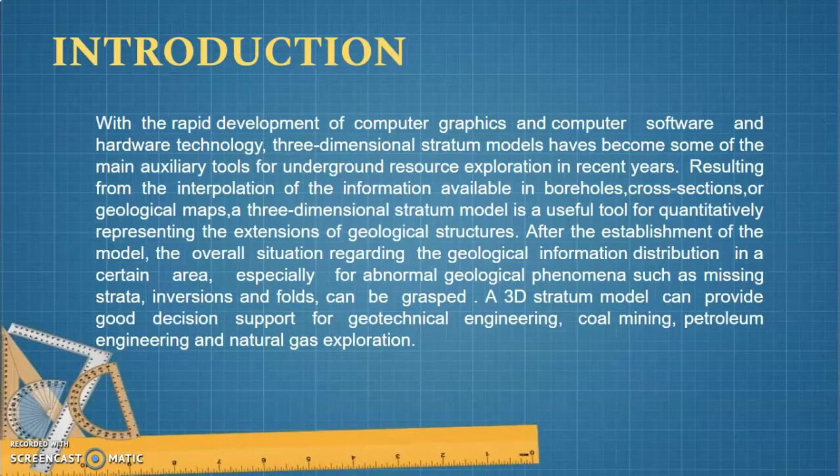Next is our definition for surveying, Stratum, Spatium, and Cadastral. Surveying is the science, art, and profession of determining the positions of points on the surface of the earth and measuring the distance, directions, angles, and elevations between them. This data helps accurately create maps and determine plot boundaries.

Stratum is a survey carried out for the disposal of the underground land as specified under Part 5A, Section 92A of the National Land Code 1965. The purpose of the survey is for the issuance of a title for a stratum of underground lot.

Spatium is concerned with a multidisciplinary approach to spatial, regional, and urban planning and architecture, as well as with various aspects of land use, including housing, environment, and related themes and topics. It attempts to contribute to better theoretical understanding of new spatial development processes and to improve the practice in the field.

For Cadastral, cadastral data, also known as cadastre, contains official legal documentation concerning the quantity, dimensions, location, value, tenure, and ownership of individual parcels of land.

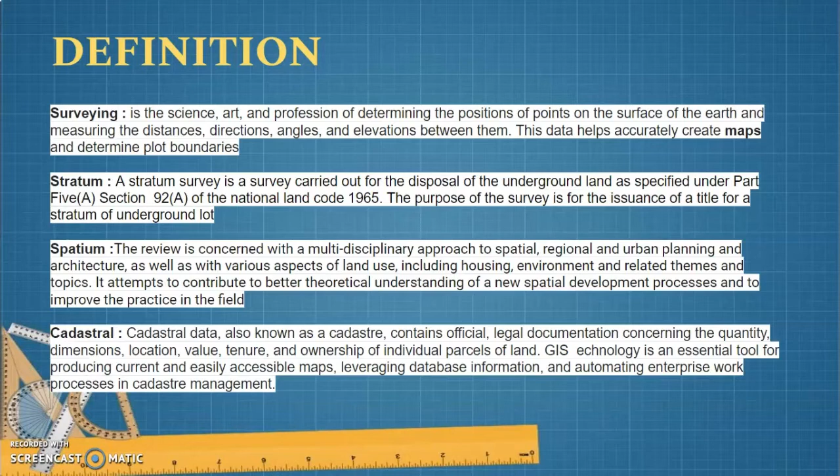GIS technology is an essential tool for producing current and easily accessible maps, leveraging database information, and automating enterprise work processes in cadastral management. Next is development of technology.

The JUPEM, Department of Survey and Mapping Malaysia, has gone further afield in the way it conducts its cadastral business. It has made a paradigm shift in its workflow by transforming its conventional surveying technique into its current modern system with the help of cutting-edge technology.

The evolution of technology has played a significant role in changing the way JUPEM runs its business, from conventional to paperless and fully automated.

As we can see, these are two 2D cadastre such as certified plan and certified strata plan, and then 3D cadastre. The concept of 3D cadastre simply defines a 3D lot as having limitation in all three dimensions. This principle means that a 3D lot may extend from a specified level and as far into the ground defined by its depth, or upwards into the air defined by its height.

Examples include the 3D conceptual model, Stratum conceptual diagram, and Spatium conceptual diagram.

Next is SmartKADASTER. The main purpose of SmartKADASTER is to establish a multi-purpose cadastral system for the future, with the prime objective of providing a solid cadastral-based spatial analysis platform which supports multi-purpose services towards smart cities.

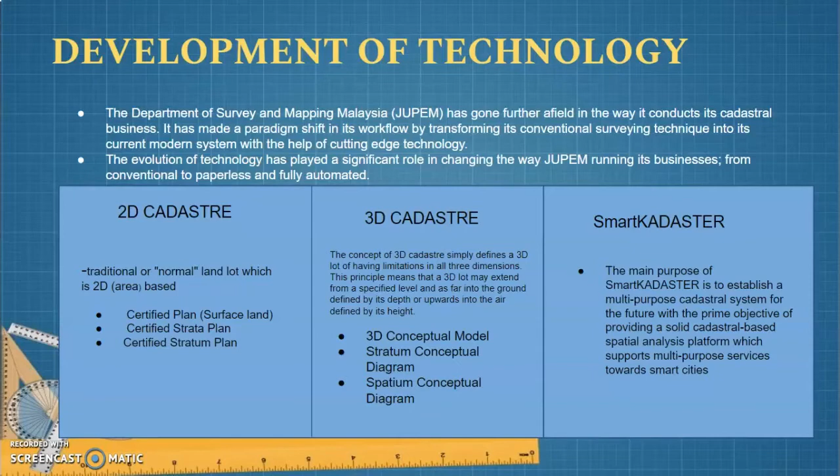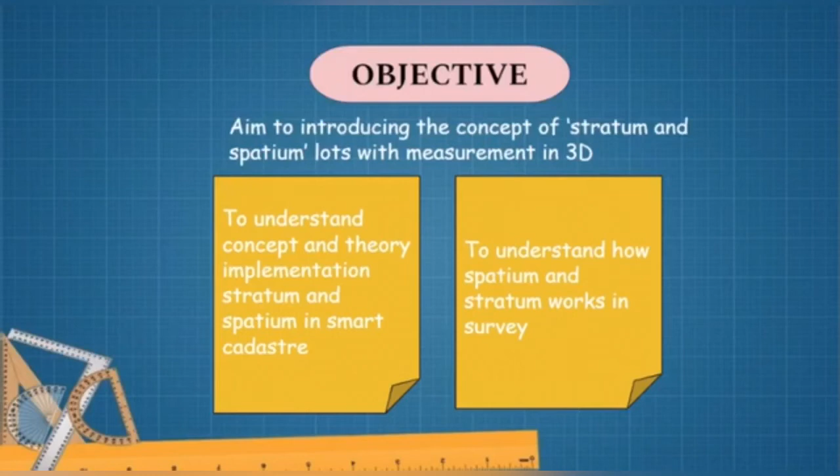This project aims to introduce the concept of stratum and spatium with measurement in 3D. The objectives of this project are to understand the concept and theory of implementation of stratum and spatium in smart cadastral, and to understand how spatium and stratum work in survey.

Theory and concept: the concept of 3D cadastral simply defines a 3D lot as having limitation in all 3 dimensions, duly registered in the cadastre, providing the right, restriction, and responsibility of the said 3D lot. This principle means that a 3D lot may extend from a specified level and as far into the ground defined by its depth, or upward into the air defined by its height.

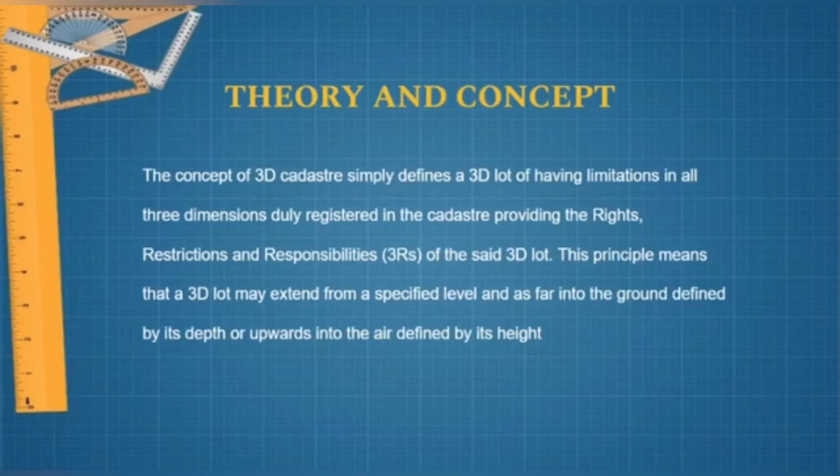A 3-dimensional stratum model is a useful tool for geotechnical engineering and other exploration work. The existing methods for stratum model construction lack a complete topological description of entities, so it is difficult to apply them to 3D geological modeling with complex geometric structures and complex topological relationships between modules.

To solve the problem, the boundary representation method is used to represent arbitrarily shaped geological entities, and the half winged-edge-face structure topological structure is proposed to describe the topological information of the stratum model for a complex entity.

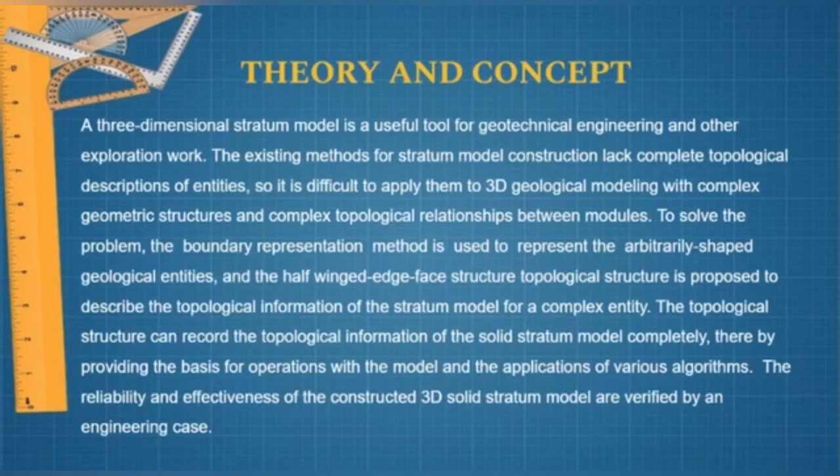The topological structure can record the topological information of the solid stratum model completely, thereby providing the basis of operation with the model and the application of various algorithms. The reliability and effectiveness of the constructed 3D solid stratum model are verified by an engineering case.

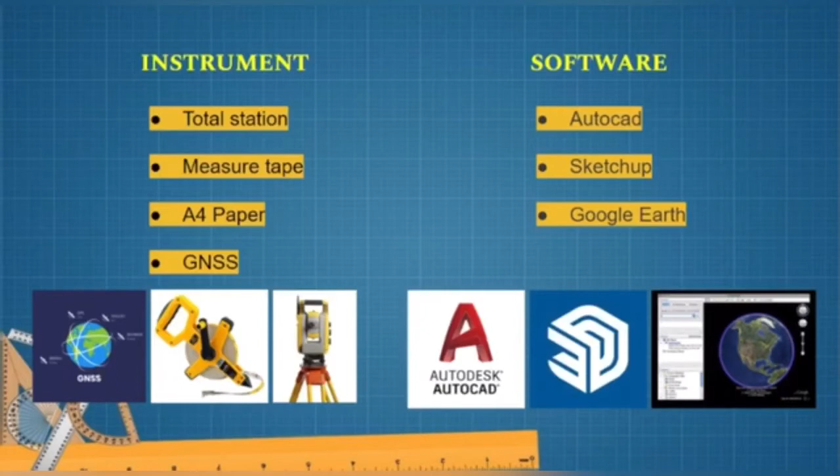For methodology, first we need to conduct the stratum survey work, but before that there are some documents that we need to settle. First, application for underground stratum work.

For areas that already have NDCDB fully JTB on Linux, send the following files. For pre-calculated plans without using NDCDB, pre-counted plans should be provided based on GDM2000 coordinates along with appropriate CRM signal notice.

Then the scanning documents process. This document scanning process serves to save documents into the document management database. The system can search and manage documents based on reference to the measurement file number. These affected documents need to be categorized according to the following categories.

Then provision of Surihan Kerjaluar (SKL) Berdigit. It is divided into 2 ways: hard copy measurement plan from the land official, or digitized PU from the land office. The file for the completed digital SKL must contain at least the following information: folder NDCDB, folder PU details, folder SKL, folder CRM, and folder GLMS.

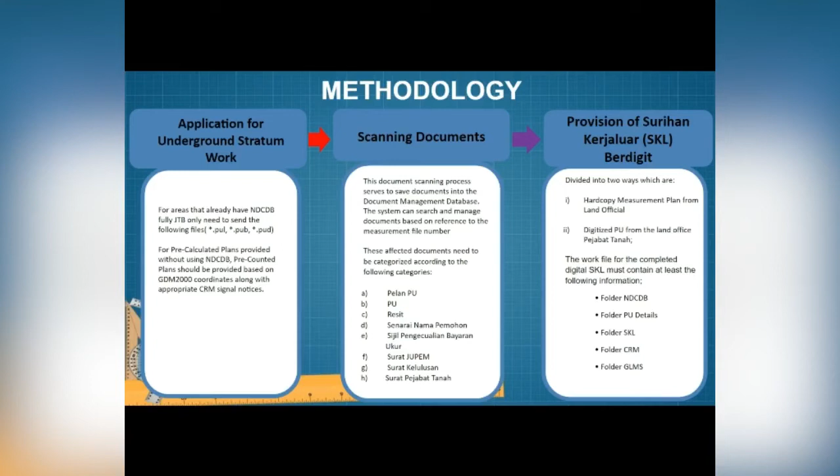Then for the data measurement, transfer of datum from a surface to the stratum layer shall be carried out to determine the planimetric basis of the measurements and coordinate values. Each cadastral measurement shall be based on a satisfactory datum consisting of the cadastral reference CRM, positioned as follows.

All measurements in Peninsular Malaysia must use the Cassini geocentric coordinate system, while the RSO geocentric system is used for the Federal Territory of Labuan.

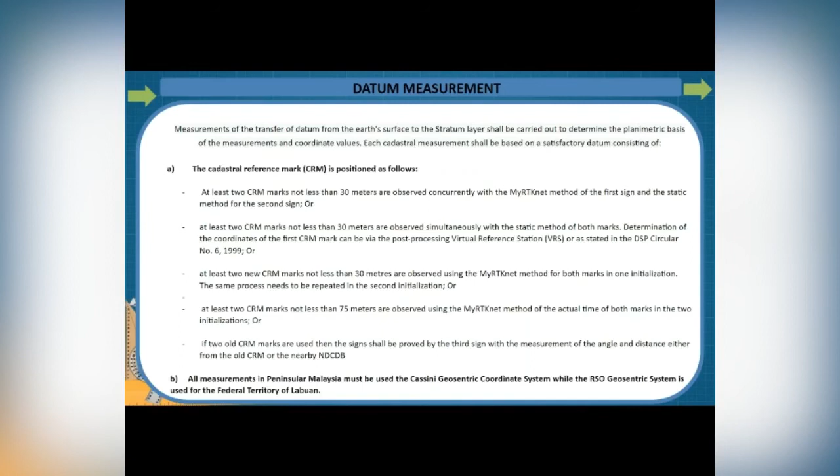For the measurement method, we can use the GNSS method. The GNSS observation method can be used for cadastral survey control measurements and stratum measurements.

Then measuring stratum lot boundary limits. For planting new border marks, we can use the GNSS method, based on the coordinates specified in the pre-calculation plan or in the workout trace plan. The second way is using an online mark.

If a new boundary sign needs to be planted above the old line, sufficient border markings are planted based on the coordinates specified in the pre-calculation plan or in the original work trace plan or coordinates.

NDCDB. Therefore, the required observation, additional information and references made in the field should be recorded in digital form directly from the surveying equipment. For work carried out by JTB, observation data must be digitally signed before being sent online to JUPEM.

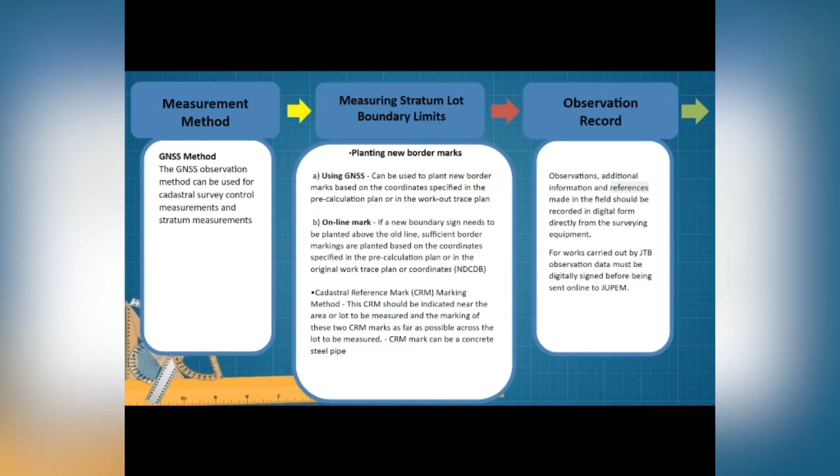Then for the transmission of observational data, submission must be made online in the form of a JUPEM ASCII file which contains files such as below. JTB digitally signs the JUPEM ASCII file, and then prepares the certified plan.

All the necessary information shown in the graphics shall be generated from NDCDB as stated below. First, boundary markers: for numbered boundary marks, the number shall be shown in a circle near the relevant boundary mark, while the use of terms and symbols shall be in accordance with the procedures prescribed by the Department of Land.

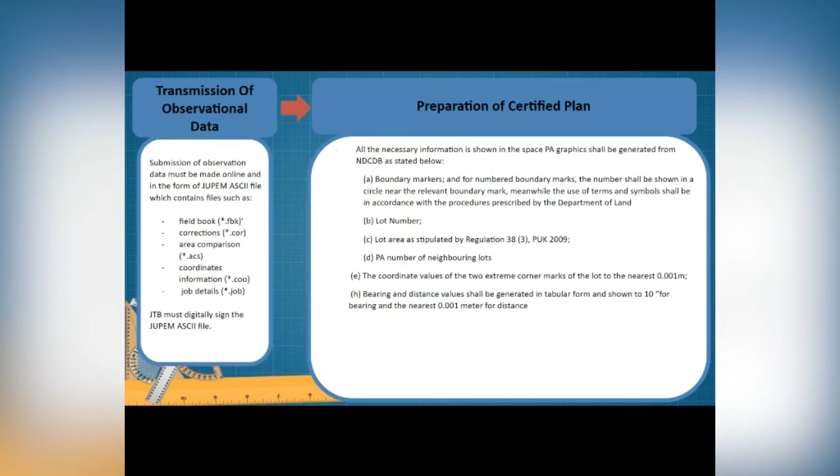Then the lot number, lot area as stipulated by Regulation 38 (3), PUK 2009, PA number of neighboring lots, the coordinates value of the two extreme corner marks of the lot to the nearest 0.001 meter, and finally the bearing and distance values shall be generated in tabular form, shown to 10 seconds for bearing and the nearest 0.001 meter for distance.

Finally, to generate the 3D model, we need to use software. The purpose of this model is to provide a 3D view of the physical size and relationship of the stratum lots. The model then underwent georeferencing to enable it to be loaded in the correct position once imported into Google Earth.

To identify suitable software for the modeling process, the following requirements were identified: first, compatibility with the original survey data format and suitability for complete survey calculation; second, the ability to create wireframe models from the survey calculation file without significant time implications; third, the ability to export to KML format, generated from Google Earth; fourth, allowing georeferencing to be applied to the models; fifth, the ability to view 3D objects.

There are three software programs that were used in the modeling: AutoCAD, SketchUp, and Google Earth.

Google Earth free software package has 3D rendering capabilities, which makes it a suitable choice for demonstrating 3D integration with existing digital cadastres. That's all from me.

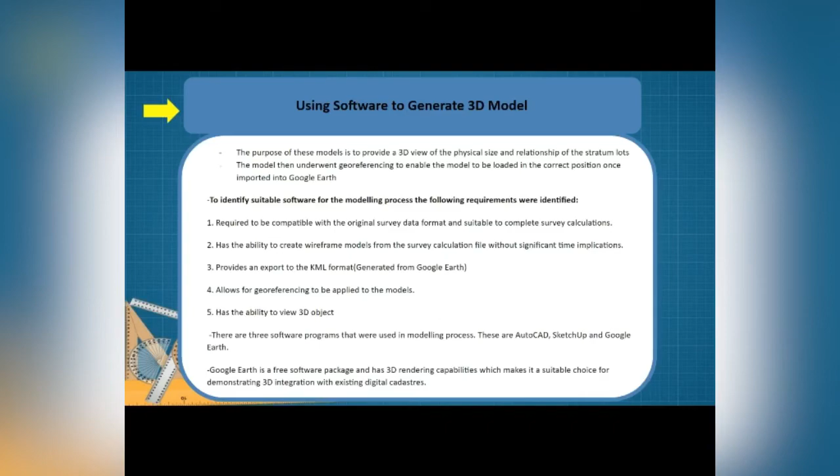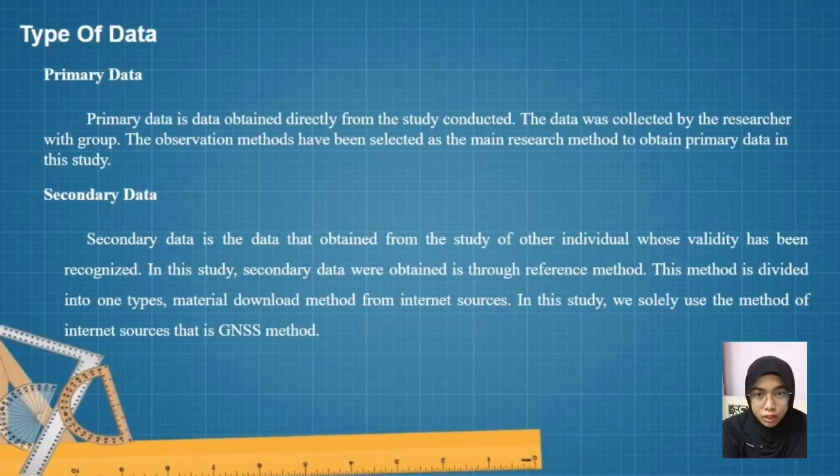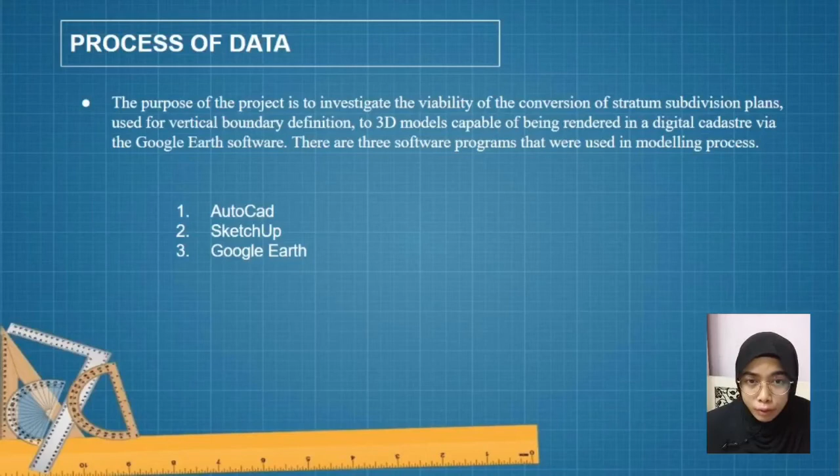Thank you. Okay, type of data. We use two data, that is primary data and secondary data. Okay, we focus on the secondary data, that is the GNSS method. Processing all data: there are three software programs that were used in the model process. First, AutoCAD, SketchUp, and Google Earth.

Okay, AutoCAD. It is a common software platform used in the surveying industry and is available for use throughout the research project to measure distance, angle, height, and coordinates. The original data being used to create the model was originally calculated using AutoCAD. So maintaining the software reduces conflict of data through conversion.

The process of measurement of cadastral land plot research by Google Earth and tacheometer instrument, as well as demonstrating how software can be used to process field survey measurements and draw a cadastral plan.

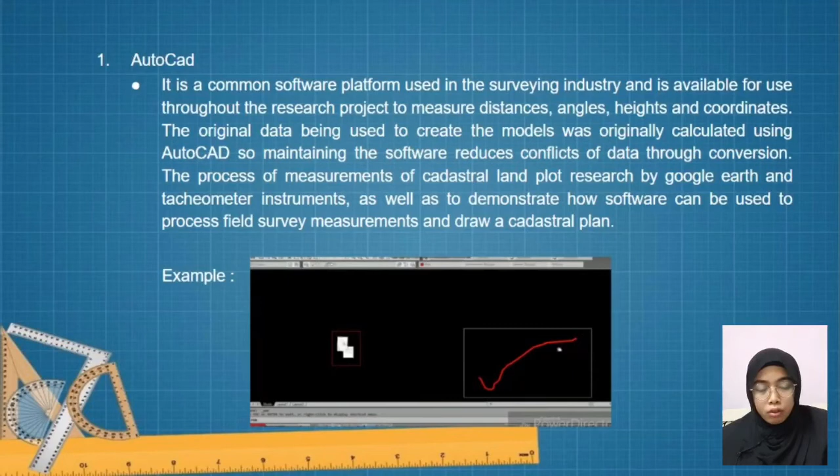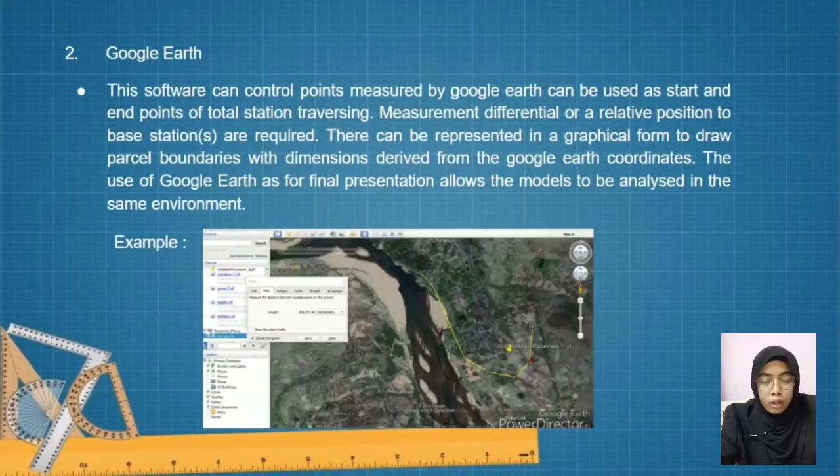The use of Google Earth as a final presentation allows the model to be analyzed in the same environment. So you can see this line in our map in Google Earth. So this line we create in AutoCAD and then we put in Google Earth.

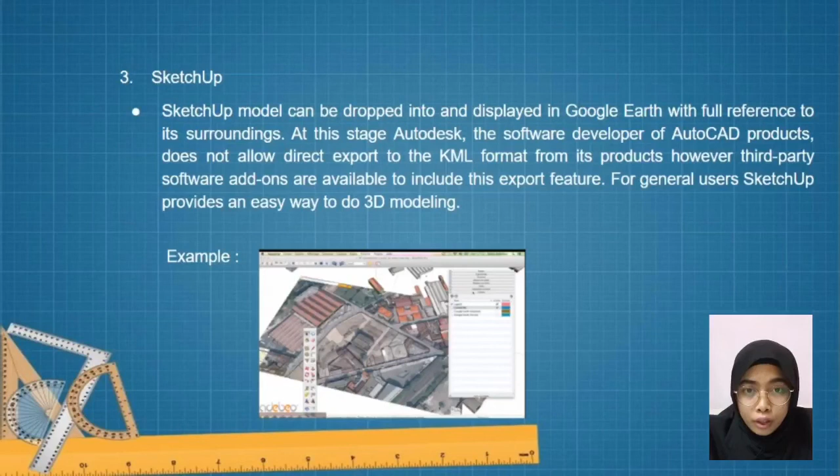For general users, SketchUp provides an easy way to do 3D modeling. So we now use SketchUp for 3D modeling. Okay, this is the output. This is an example. Okay, next, this is example 2.

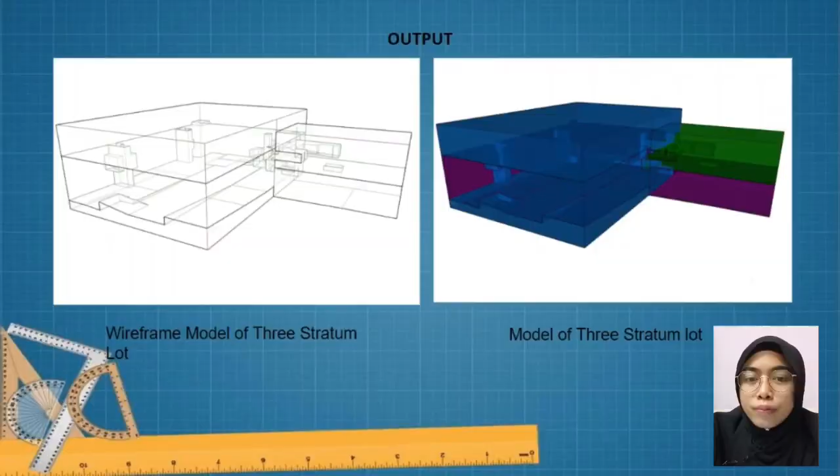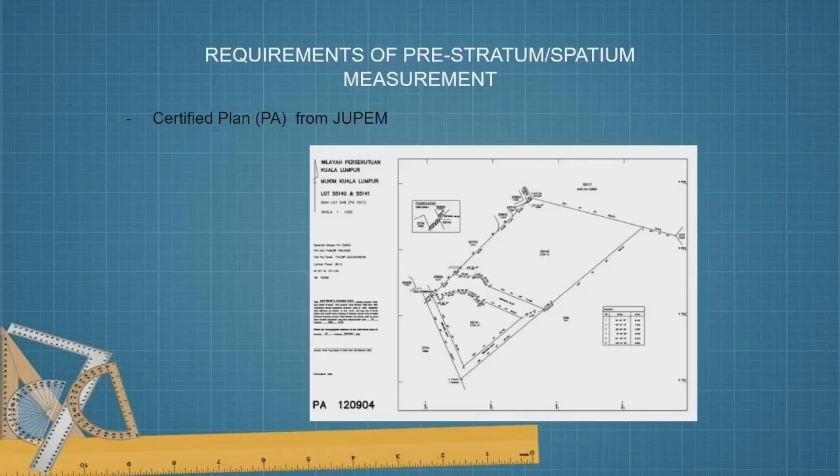So for the planning of works, for the requirements of a pre-stratum or pre-spatium measurement, we need to have the certified plan, which can be obtained from JUPEM, the certified stratum plan also from JUPEM, and we need to obtain the datum since we deal with heighting or altitude.

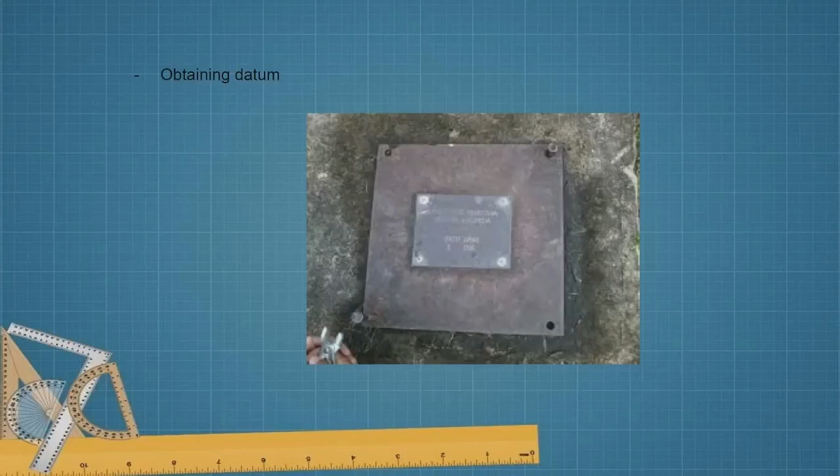According to section 92B and section 92E, for agricultural land, 6 meters and below are considered eligible to apply stratum. For buildings that are 10 meters and below, you can apply stratum, and industrial lands can apply stratum under 15 meters.

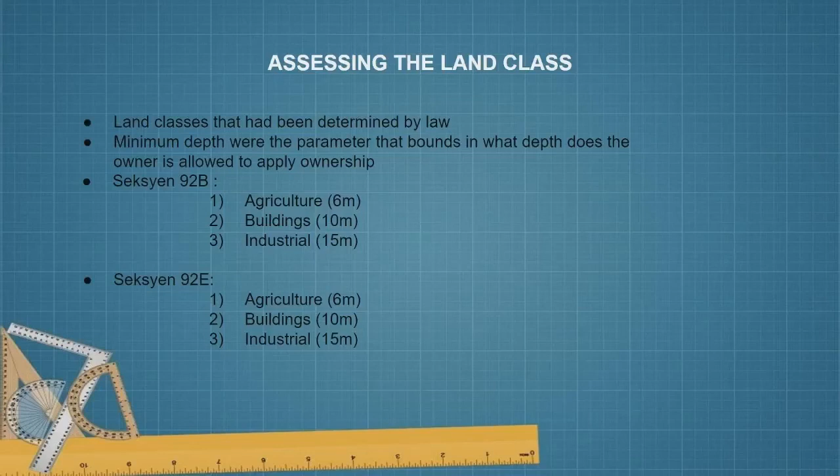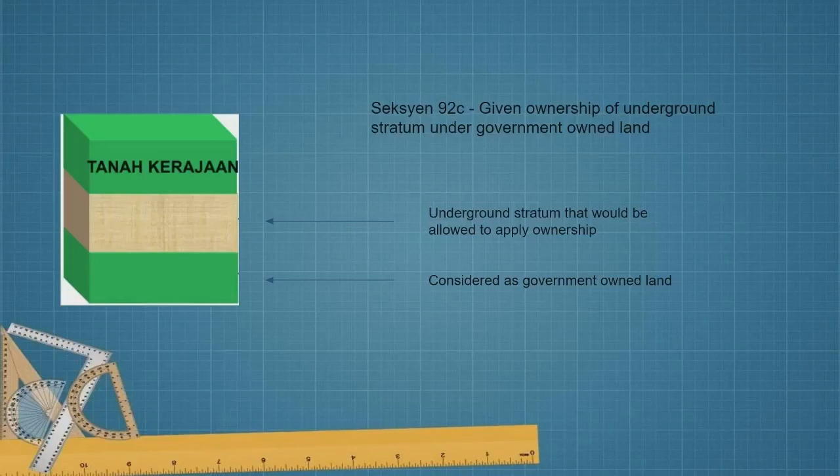So next, according to section 92C, given ownership of underground land, stratum under government owned land: if you can see the top one, the green surface, is the government owned land, and below it is the underground stratum that would be allowed to apply ownership. And below the stratum eligible for ownership, it is considered as government owned land.

According to section 92B(1)(a) and section 92D(1)(b), the owned land that was not depth specified, under it is eligible to apply stratum ownership, and below the eligible stratum ownership, we can consider the land to be government owned land.

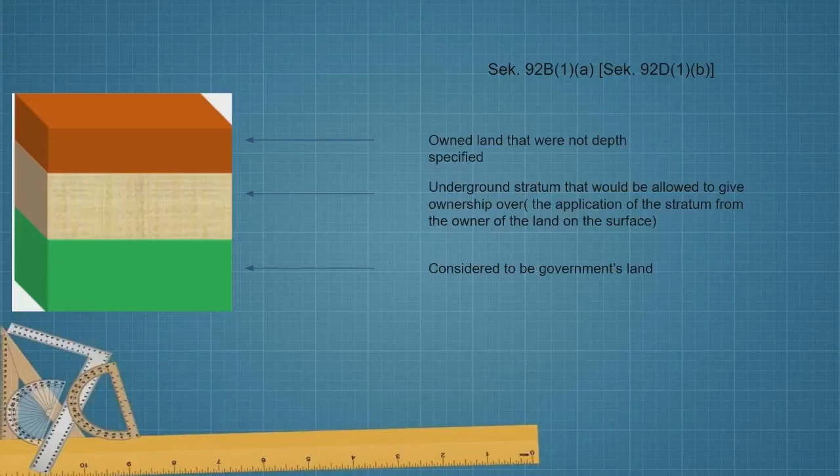Next is section 92B(1)(a) and section 92D(1)(b). With the owned land without depth specified on the surface, whilst we got depth to be specified by state authorities below at the right. And on the left, part of the land that has been approved for independent and unrelated use, which is on the left, the near beige color,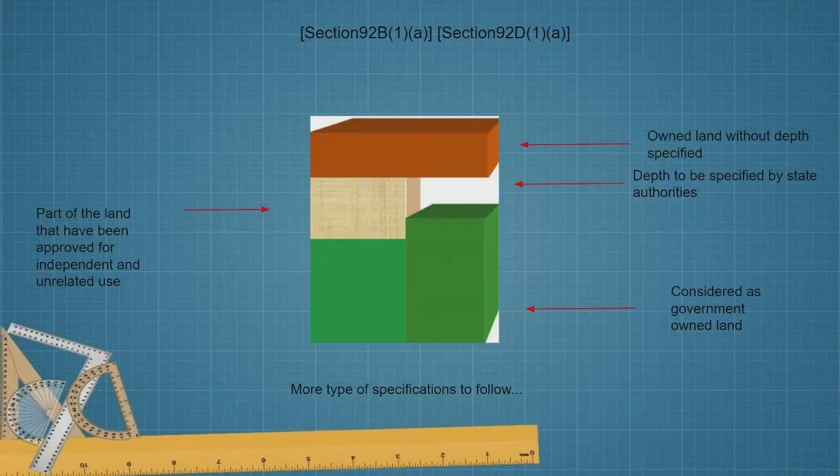and on the right bottom is considered as government owned land, as well as on the left side bottom of the layers of ownership. So these are the specifications that we have to follow, and there are many more specifications in terms of stratum owned land.